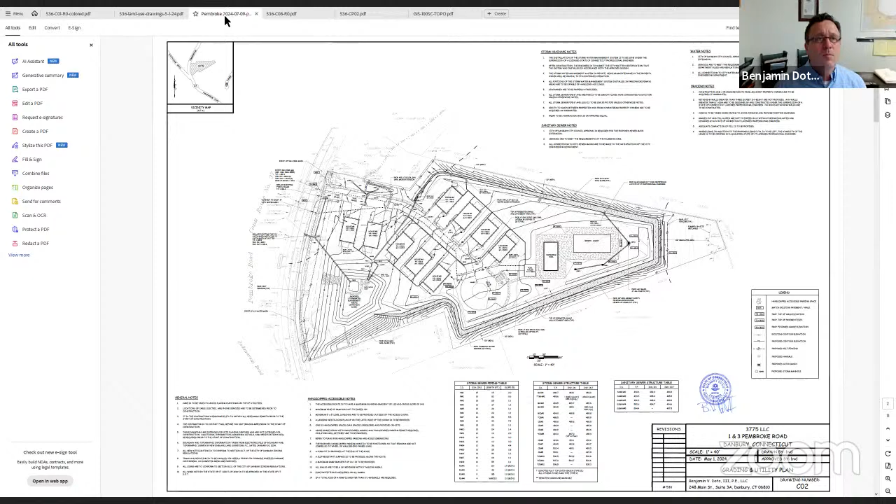I want to get to the landscape plan, right here. This was done by Dean Pushlar. As I had said, the EIC has asked us to revise it—this wasn't the original plan that was submitted that you have in your package. If you were to compare this to the one you have in your package, you'll see that this has significantly more plantings throughout the site. EIC wanted to see a better tree canopy throughout the site.

And in Ally's letter, which I'll go over later but I'm going to talk about now, Ally asked for some additional plantings along the front where we have the row of trees. As you can see, these trees are intentionally set back from the road because what we want between this row of trees and the sidewalk, like you see on most state highways when the state does control the shoulder, is a mowed lawn in that area. So again, that's for sightline distances through there.

Ally's asked if we could put some more planting beds in between some of these trees, and that's something we can do—I'll talk to our landscape architect about that. But again, they're going to be more in line with the trees and not in front of the trees, because as you know, once you have a planting bed and you let it grow for a few months, before you know it, it could be 3-4 feet high. And then we defeated the whole purpose of improving the sight lines through there.

The other plan that was asked of us by EIC, which you do not have in your package—I'll get this to Ally—EIC asked us how we were going to phase this, because as I mentioned, there's going to be some material removed from the site, and the proposal is to do it in 3 phases. Obviously I'm not going to go over every detail of it, but you set up your erosion controls, you take down the trees you need to take down, and then the site is going to be phased.

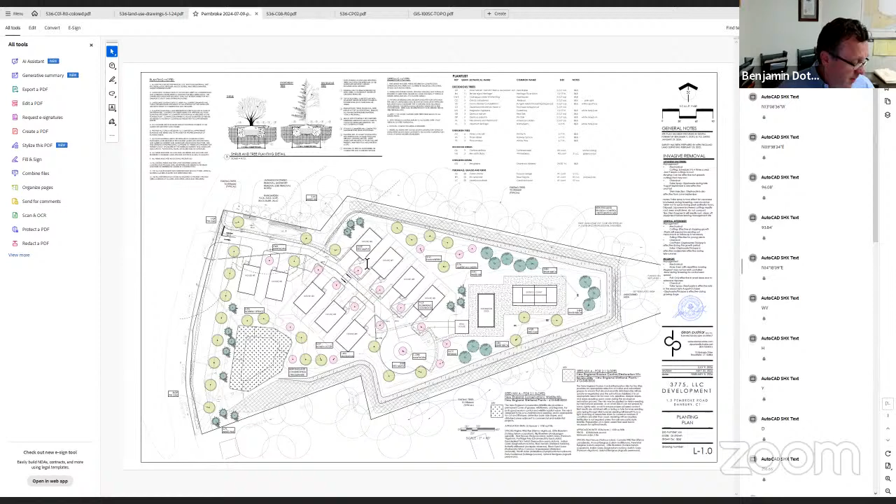Oh, the one thing I didn't show you were the... let's see here. Shoot.

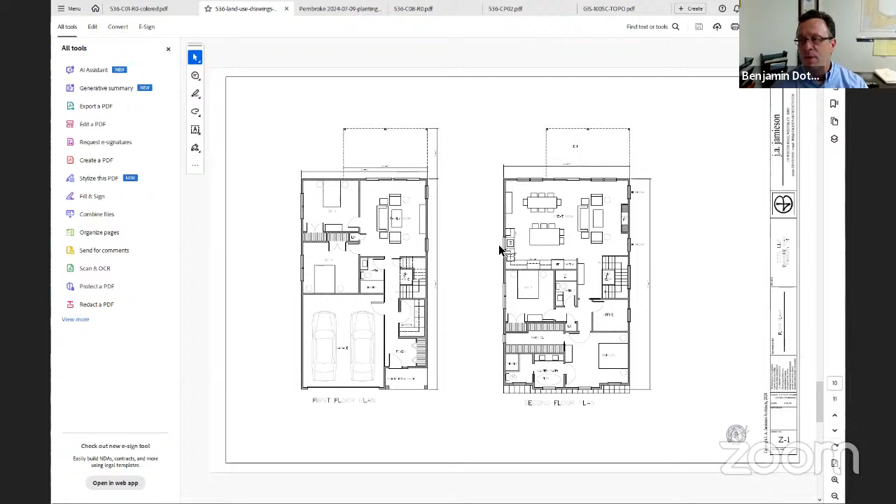I didn't mention that our architect, Jamieson Associates, had prepared the elevations, because this isn't a subdivision where the houses get built later. This is a cluster development site plan application, so part of the requirement is to show the elevations.

The houses are pretty straightforward. They're all single family houses, 2 stories, 30 by 50, that's 3,000 square feet. Taking out the 500 square foot garage, that's 2,500 square feet of living space plus a 500 square foot garage. The houses are all similar, with decks in the back. Pretty straightforward.

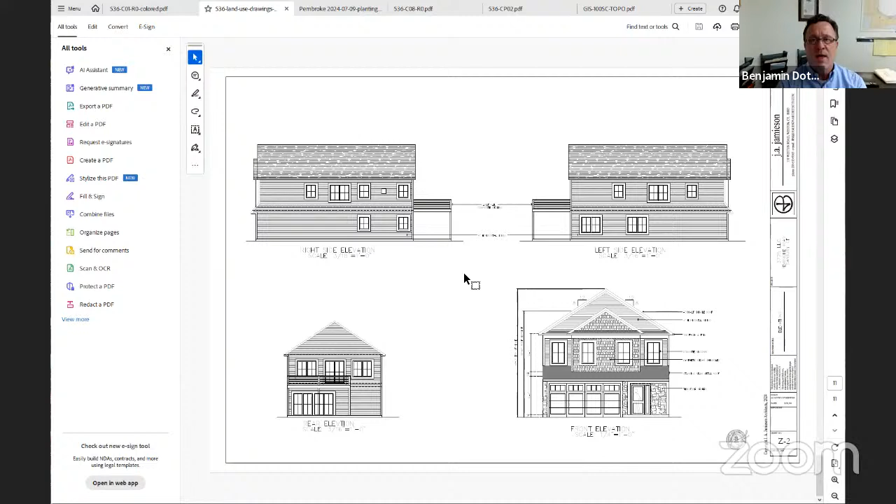So I'm going to pass it over to Ray, unless anyone has any comments for me at this point. Any questions for Ben at this point?

Bob, go ahead. Ben, is there any retaining walls on the southeast or north side way in the back there? Or is that what's that gray kind of line all the way around?

Yes, Bob, that is a 4-to-1 ledge cut, 4 vertical to 1 horizontal. So that's where our ledge cut will be. There are no proposed retaining walls. I'll let Ray touch on that.

In the event we find an area that it doesn't work, it would have to be replaced with a wall or supplemented. I'll let Ray touch on that.

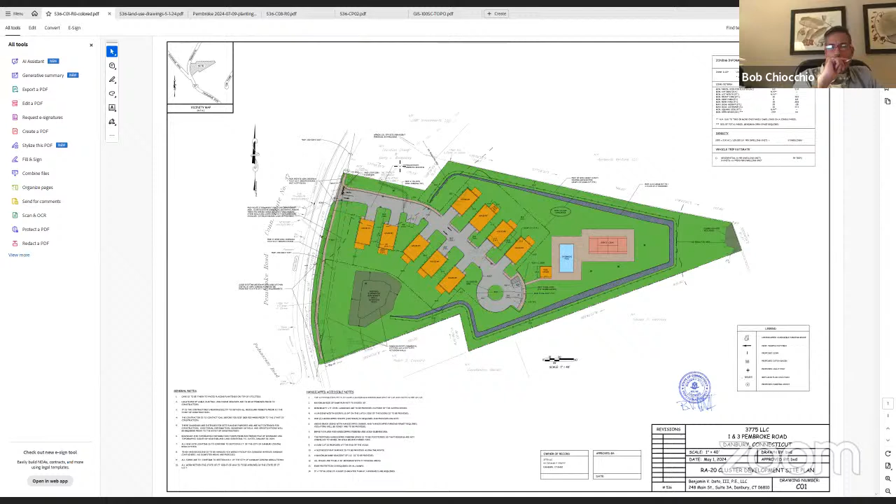But yes, that's a ledge cut basically surrounding the north, south, west and east sides of the development, because you can see the topography of the site from the survey right here. Although it's flat in the front, it climbs up quite a bit in elevation to the eastern 1/3 of the site there. But yes, that's a ledge cut, not a retaining wall as proposed, Bob.

Okay, and I'll use that as a segue. For the record, my name is Ray Janeiro, licensed professional engineer, principal at Down to Earth Consulting, office located at 27 Seaman Company Drive, Watertown, Connecticut.

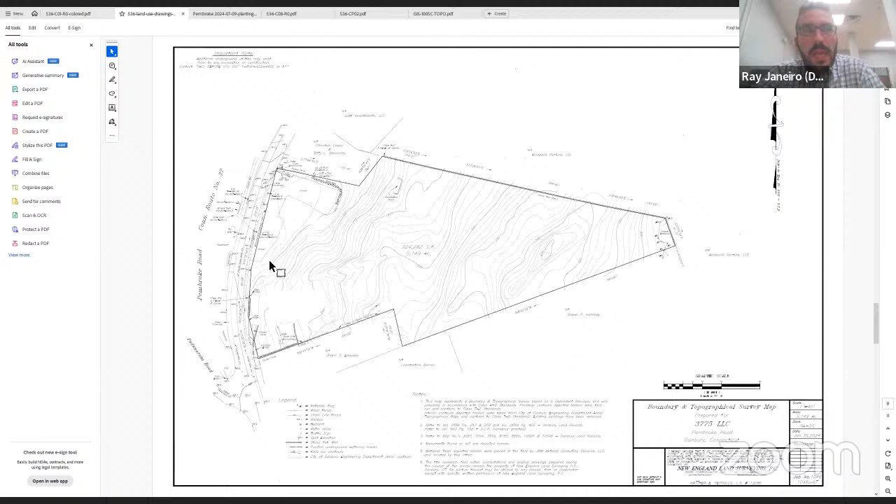After that is done, we recommend that the retained blasting subcontractor performs a test blast in an isolated site area. After an area is selected, we set up, detonate a charge, and collect data that we use during production blasting. That generally consists of setting up seismographs 50, 100, 150, 200 feet away from the test blast area. We use that data to have a better handle on whether, during production blasting, we have any sensitive areas based on neighboring structures that we particularly want to monitor.

During production blasting, the third leg of the stool, if you will, is that the blasting subcontractor is generally required to monitor for air blast pressures and vibrations as part of their liability insurance requirements. We always recommend to the owner to also retain a third party engineering firm to independently monitor vibrations as well, to ensure that rock is being removed in accordance with prevailing standards of care and all applicable safety standards.

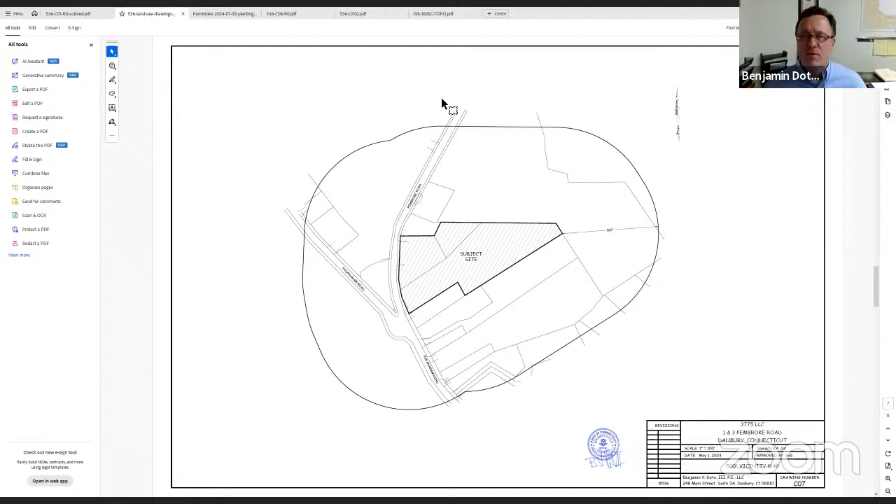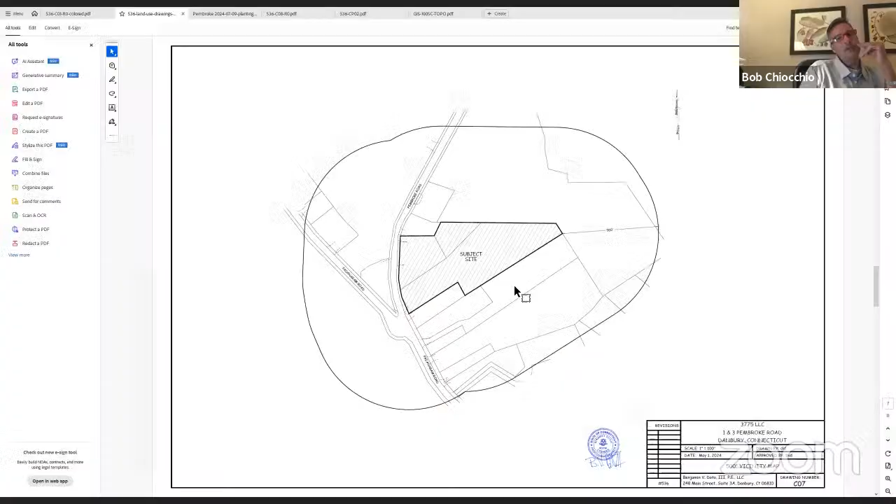Maybe Ben, if you could put up the other one. Sure. What I'm looking for is, can you kind of show us where the rock is? Does it go all the way to the road, and what area will be where the rock will be removed? Sure, Bob, let me get back to that drawing. I think whatever drawing is best to show that.

I'm going to show you my drainage area maps, only because I think it encompasses what Ray called a catchment area and I called a swale. It does both. Can everyone see this on the screen? Okay, so the rock excavation is basically going to be the majority of the area where you see, let's start at the courts.

That area is definitely going to be excavated, as will the swimming pool, the clubhouse, the cul-de-sac, and definitely houses 3 through 9 and the road from there. The detention basin itself will also be excavated. When you go to the site and look at the topography, where the kennel's slab is now, the former kennel, that is where the detention basin is going, and we are lowering the grade there. So I would say probably 2/3 of the site, Bob, we will have rock excavation on.

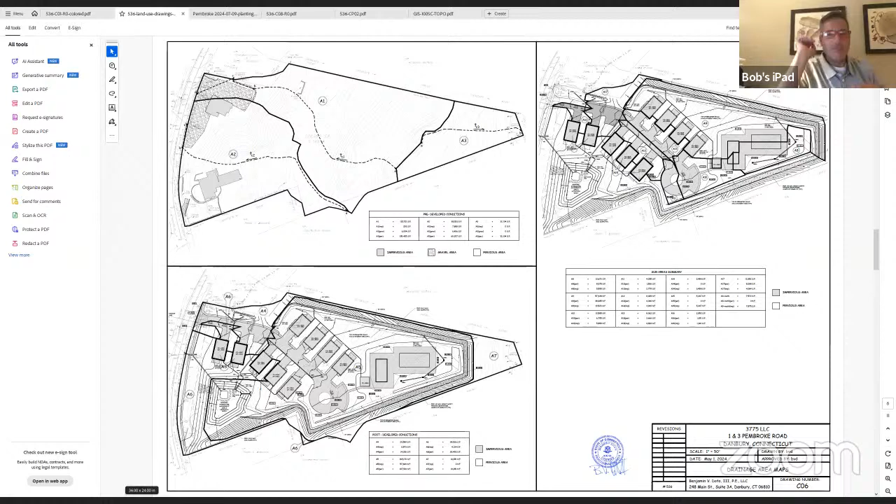So yes, to answer the commissioner's question - basically, how high of a rock are you going to remove? When you're going in, is it like 50 feet? Is it more? I can answer that, Bob. Yeah, 50 feet at its max.

So when you come in, you can see the color plan here, it's sort of easier to read. Let me get some of the faces out of the way. There we go. So looking at the color plan, houses 1, 2, 3, you're not going to have ledge cuts exposed there. Starting to the left, right where the property jogs, you'll have a 0 to 2 or 3 foot ledge cut along there. Toward the back, due north of the swimming pool, it's probably about 35 feet, and at the northeast corner it's about 40 in the back. Yep, 40, 45. Then along the southern side, just south of the pool, you're probably 45 to 50 in that area - that's the max cut height right there.

And then if you look at the cul-de-sac, the cuts in that corner range from 25 to 28 feet, then back down to 0 at the detention basin. And keep in mind, we're not starting our cuts at the property line. We're starting them 20 feet from the property line.

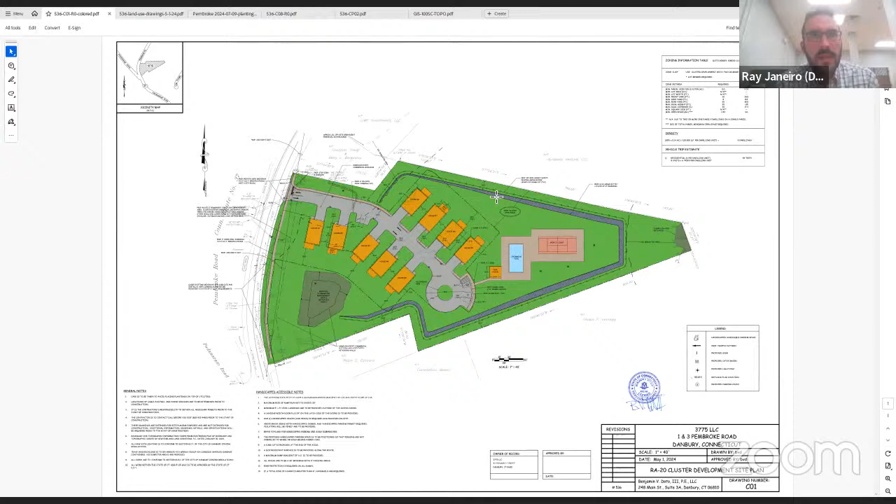And as I mentioned, the end result you'll see on site is the rock faces from the cuts, but it won't look like the surface of the moon when you're walking on it, because we plan on over-excavating the rock and bringing in some soil so we can get some trees and plantings. That's something the EIC really pushed for, and we are doing that here.

This area of Danbury, the parent bedrock is a granitic gneiss, very competent rock. It also has a high potassium feldspar component, so it's kind of white and pink, and it's a really nice looking rock, no pun intended. So I feel pretty good given the amount of exposure of the rock cut, and the max height of 50 feet. At the end of the day, you're going to have something that's pretty aesthetically pleasing, versus a concrete type retaining structure.

Okay, so when you're back there, you're just going to see a total solid rock wall all the way up, right? Is it going to be pretty level, or slanted at all, or does it depend on how it's cut?

It's going to depend on how it breaks. Fortunately, with the anticipated cuts, they're not too deep where we'd require popping these in two lifts, so we'll be able to do it in one lift.

And again, the applicant is very aware of how nitpicky I can be as the rock is being excavated and the rock slope is being revealed, and what final scaling measures we would require to ensure that rock slope is safe and stable at the time of construction. As Ben pointed out, over time, freeze-thaw, that rock will weather, and material will accumulate within the rock catchment area. But it is a bit of a process to get it done right. I've worked with the applicant on many projects where rock excavation and the creation of rock slopes are required, so I'm feeling pretty good about this.

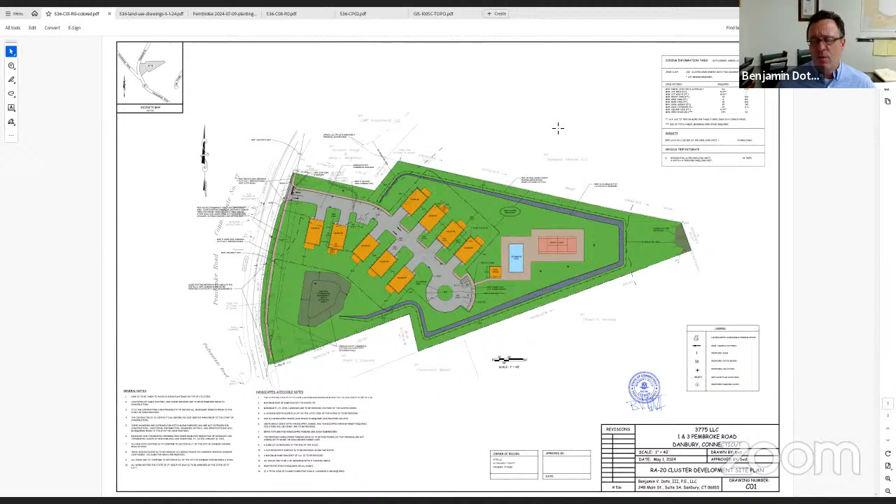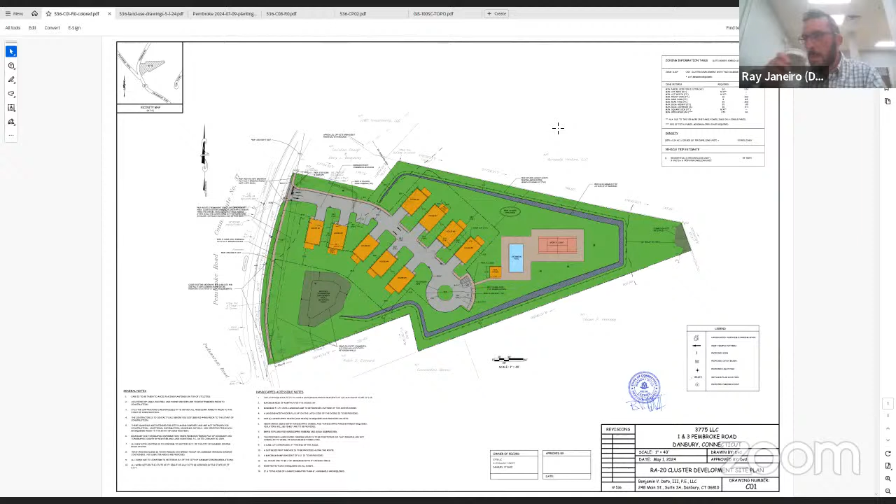I hope we answered every question with respect to the site and the ledge, but one thing, as you're aware, anytime you have slopes that exceed 2-to-1 in Danbury, the regulations require that they be evaluated by a competent professional engineer, or a retaining wall be designed by a professional engineer. That's a condition on almost every project we do here. We knew from the get-go on this project that we would have ledge. The applicant has done some test pits on the site, very shallow ledge everywhere. We discussed it, and it was imperative that we retain Ray prior to site development plans being done, as opposed to just assuming some things and hiring him when we're getting our building permits, if this project is approved. So we felt it important to bring Ray on as early as possible on this project, which we've done, and I think it was the right thing.

We have a plan that works. It works with the zoning, it doesn't require any variances. And it achieved a lot of the issues that I know the zoning commission wanted when they rezoned this property, as far as the type of development they want to see on this road. So anyway, I'll leave it at that.

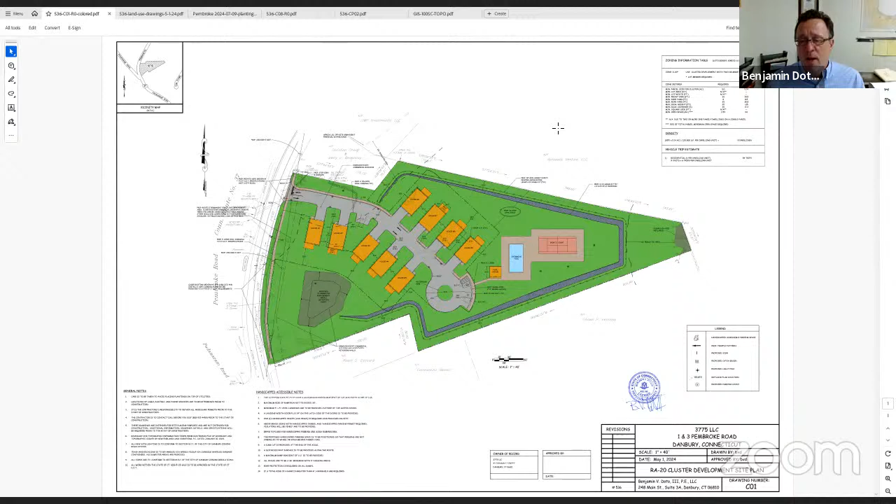Thank you very much, Ben. Is there anyone else wishing to speak in favor of this application? Anyone else in favor? Is there anyone wishing to speak in opposition to this application? Anyone in opposition?

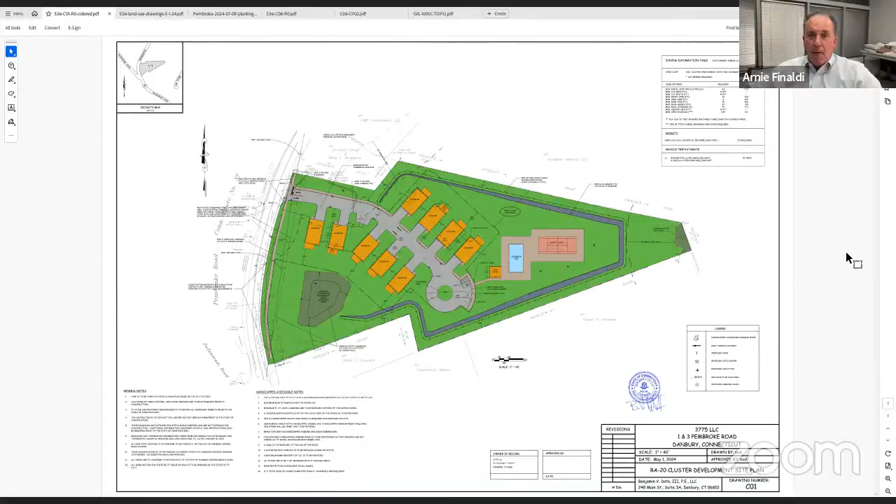I see a hand up with a Deborah Kennedy, but there's no video. You're muted and there's no video, so I don't know if that's... there you are. Okay, can you unmute yourself and give your name and address for the record? Again, Deborah Kennedy, I see a hand up, but I can't hear anything. You were muted, now you're unmuted. I'm sorry, I still can't hear anything. She's muted. There she is. You'll have to unmute yourself. My apologies, Ms. Kennedy, we can't hear you. She's unmuted now, but for some reason we can't hear her.

Yeah, I'll tell you what, we'll go to Mr. I see another hand up, a Ken Gucker. We'll go to him, and then Ms. Kennedy, we'll try to come back to you if you could sort that out. So, Mr. Gucker, go ahead.

My name is Ken Gucker. I reside at 89 Padanaram Road, and I am outside the 500-foot perimeter that we're talking about with this project. But I wanted to give you some background as somebody who's lived at this location for 38 years and was the unfortunate victim of the work that was done at the development of Stetson Place. Stetson Place, being across the street from this project, is about 2,200 to 3,000 feet from where I live. Now, as we listen to the experts and the engineers talk, and I'm not doubting or belittling them with their knowledge, I just want to talk about the physical experiences that I have had. I would be well outside the range of any effect that would happen with Stetson Place when it was being built, but also outside the range of this project.